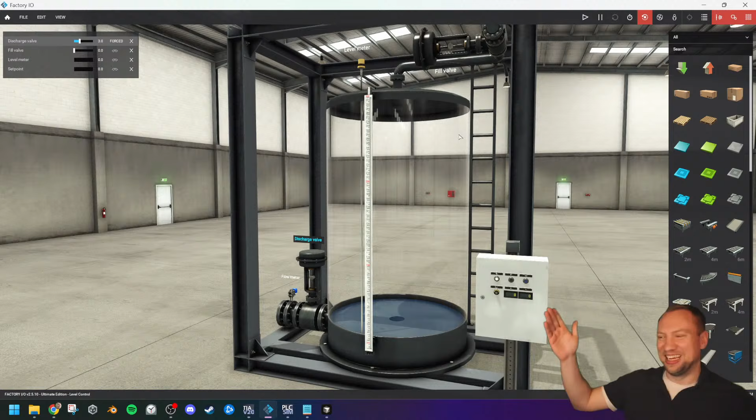Let's have a look. Now, what do we want to achieve? We do have the tank system. I chose this because we've talked about this previously, right? Now this tank system currently is not controlled at all, right? I can manually, of course, turn on the fill valve and have liquid go in, right?

But of course, what we want to do, we've talked about this previously, is I do have a set point here. If I turn this set point knob to like 50%, that's what it is right now. The tank, the controller should control the tank fill level in a nice way. And we are going to have a PI controller today, right?

And I will not program it. The last time, those that have been there, right, the last time I have developed the code, it took me 1.5 streams to do this. I was also teaching, talking, doing stuff on the side and so on. But I messed up a couple of times, right?

So now what I want to do is let AI do this. So I will release the fill valve, and AI is supposed to control the fill valve here, or write me code that does that.

Oh no, you're blind. Hartux, get some rest. Go to sleep, get some rest. I hope you're not in the train right now. Get some rest, or sleep in the train if you're in there. Goodness gracious.

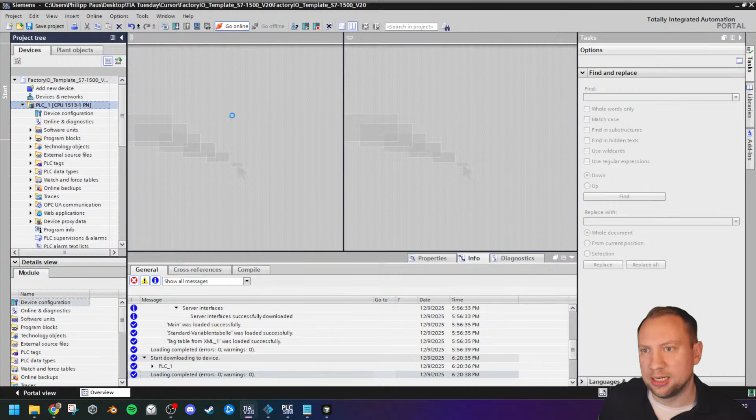Right? Now for this, what I have already done in preparation is I already created a PLC here, and this PLC is currently loaded into PLC SIM and is currently also connected to Factory IO.

What I have also done is I have prepared and imported the necessary PLC tags here. That is pretty much what I have done. So my PLC, I won't repeat that, we don't need to repeat the basics every single time.

So I already have my set point here, for example. I have my fill level, I also have the flow level, flow meter, I imported, it isn't really necessary. But yeah, so for example, I can change the set point here. If I turn the set point knob, you see the set point here in TIA Portal changes, and we have the fill level. So I have already created this link in the background, which is the basics, right?

Hi Tunnel, hi, how are you doing?

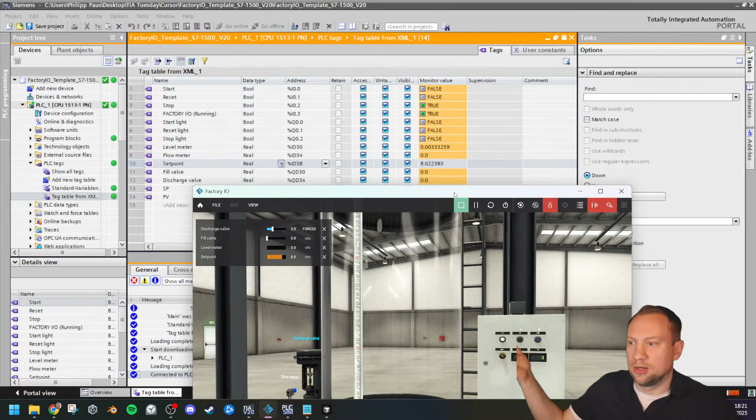Lord, it can make ladder logic. My job is being touched. It's source code, it can generate all kinds of source code.

Ladder and function block and so on use a PLC programming standard which is public, the IEC 61131-3 standard. So this standard, your PLC programming standard, is public. Obviously it can create PLC code, and TIA Portal can use source files, so it can generate source files which can be imported.

Huh, yep, sure, let's see. Oh no, Hartog's already asleep on the train. Yeah, I don't like calls either. I'm not fully against calls, but I don't really like talking on the phone. Never really liked it.

Okay, so that's my preparation that I have done. My program, however, is empty. Is Cursor better than Claude? I don't know, I've been using Cursor for a day and I have not used Claude at all.

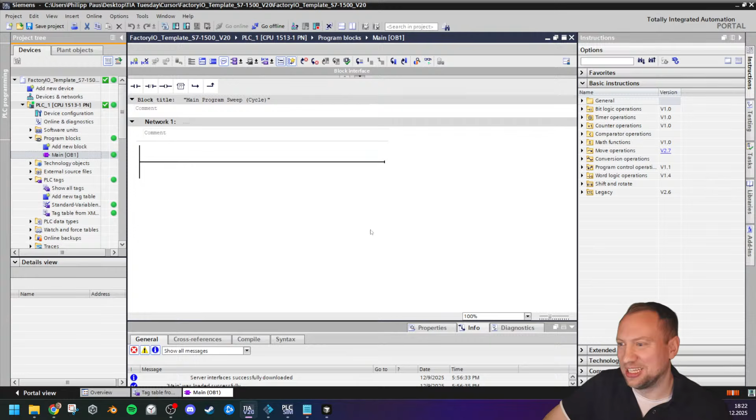I know the numbers of standards, I do know some standards of course. Let's see, Mahmoud says, you think vibe coding can create ladder or function block?

It can create all kinds of things. So let's see, what I want to do, let's get started. Now the first thing I need, I do have a workspace here. This workspace is just a folder that I have created. My TIA project is in there, and some stuff is already in there, like everything that I have.

What we need as well, I will create a new file, and this file will be my... I don't know, how will we call this? We will call this AI PI dot SCL. AIPI dot SCL, right?

A source file, Lian, a source file is code. As simple as this is, all kinds of code are a source file. Now what your PLC does, it takes any kind of source file and translates it into something that it understands. For example, the file I want to create now, I've given it the file ending SCL, so I want any system to interpret this file as SCL code. If you have Python or C# code or whatever, you'd have another file ending.

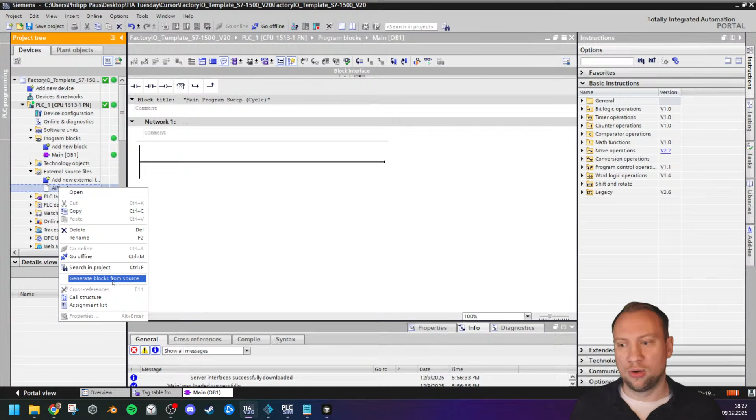If this would be correct code, which it is not right now, TIA Portal would generate a standard function, a function block, an organization block, a data block, whatever file, a technology object would also be possible. Any kind of object that we have in TIA Portal, I could create from such a source file.

Now if I hit OK, it will give me an error. Syntax error. The text file that I have just created is incorrect. Who would have guessed? The text that I have created starts with this. Oh, this is incorrect. How could I forget how to write code?

So now, not just theoretically but practically, I'm going to open another file. Without AI, in any text editor, it could be WordPad, I could generate my code in this file. Literally, I could write the code in there. The IDE that I have, Cursor, helps me with making it prettier.

So if I would want to create a function, I would write 'function', give this a name, test function or something. I would say what's the return parameter. Maybe the return parameter could be an int. And I could give this a lot more stuff here. Now I saved the file, and this should be correct if I didn't do anything wrong.

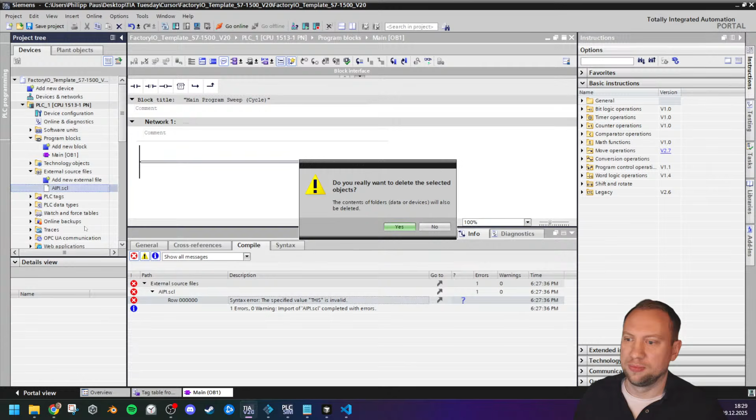Now what I can do is relink the file, because I'm not updating it, I have to relink it. And what I can do now is generate the block from the source, which should create the function here in itself. There we go. This is my test function, the one that I just created in an external text editor.

Could be anything. I could literally open this file in Notepad or in my editor. Now in the editor, I can do fancy things like have a variable input. This variable input is supposed to have two inputs. Input one is of type integer. I do have a second input... it doesn't matter, no, I will not have a second input. Then I will end my inputs, I don't need any more. There we go, I can literally program in the editor here.

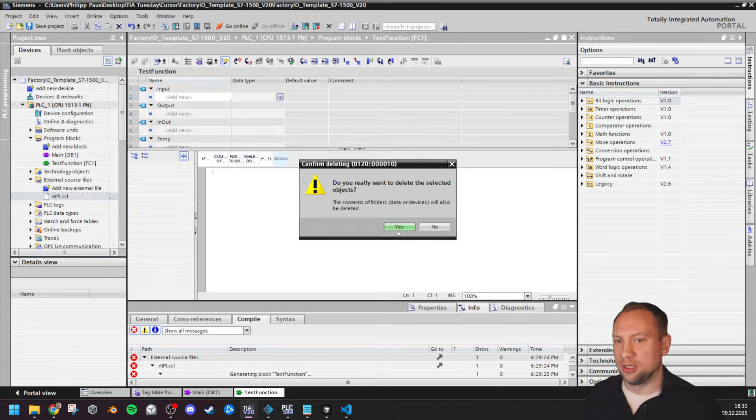Now with this, I saved the file. What I can do is relink the file again, there are better ways but that's what I do right now. And now with this, I should have... oh no, I did a mistake. End function is invalid. What did I do? I probably misspelled something. No, this should be fine.

Do I need to return something? You might be right there. Let me just type out some things that I think might be missing. Yeah, I think I have to return something. You are correct, Jason said earlier I need to return something. So test function needs to return something, which is this block. Let's make this block return an integer, the sum of both inputs.

Now I could have written this in my text editor here, sure, that is the base principle. This is just a text file. Let's assume I wrote it here and I know how to write this, let's just assume this was me, I know what I'm doing. Then what I would do is re-import it right now. I will test it without, but I think I need to. I can now generate the block from the source, which hopefully is correct.

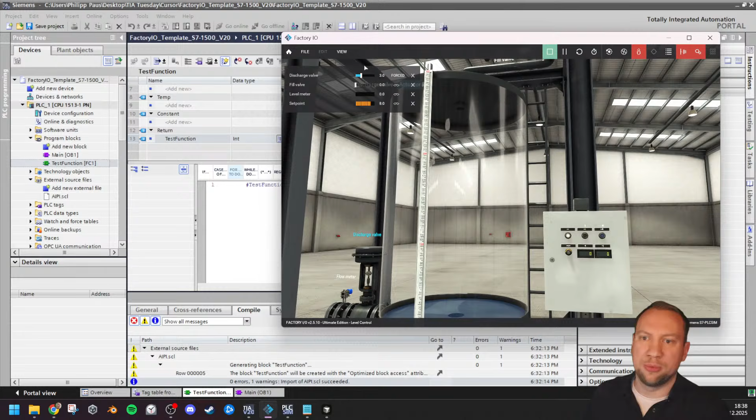Automation and PLC programming says, yes, AI definitely helps. The thing is, it is a tool. You are correct. It is a tool. I wouldn't do it for everything. I still want to be the one that understands everything and that has control. AI is not advanced enough. Mahmoud says we also have the discharge valve. The discharge valve I don't want to use. The discharge valve I will set to a constant value to just have an outflow of the tank. But very good, we could have that as well. Okay. Shall we? Enter. If it right now says, hey, you don't have enough credits, shit. We're done.

We're done. Oh shit, sorry. This is not okay. This is not okay.

So there, Ono asked, which AI tool do I use? It's called Cursor. It's an AI tool for programming, especially. It does that. Oh shit. Oh god. It even knows that I want to have a proportional gain as an input, a KI. It even gave me those as inputs additionally, like it just knows what I want.

And look at this. There's code. I will not read it. Why would I? Why would I still read that code? I will say keep the file. We do have a controller now. This is not okay. This is so not okay. And if I open this in the editor here, for example, you will see we have this code now in the file.

It's not going to work. I can already tell you this will not work the first try. Probably. Right? Most likely it won't. Look at this, author auto. No, the author is me, Philipp. It knows my name. How does it know my name? Shit. Oh no, AI knows my name. Oh god. There we go.

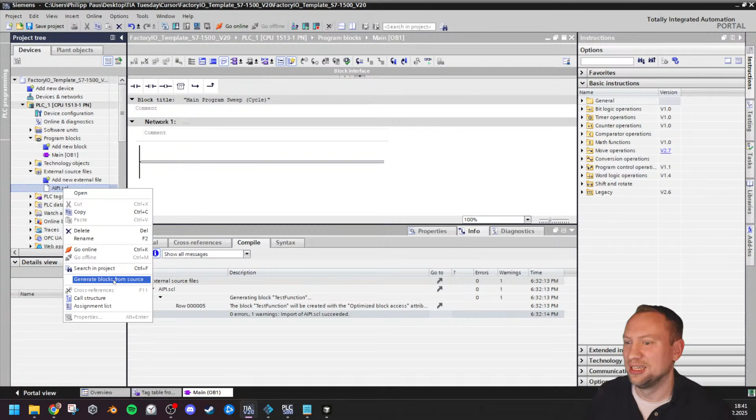I know that. Right now, if I click on generate blocks from the source, there will most likely be a ton of compilation errors. Right? That is what I expected, actually. And that's it. That's the stream. AI sucks. See ya.

This is the future, though. So Emil says this is the future, especially with the integrated Siemens Copilot tool. The integrated Siemens Copilot is fantastic, but I don't have a license. It's way too expensive for me. So no, this is free though. Right?

Ram asks if this would work to generate reusable blocks. That's what I'm doing. This block is going to be reusable. I will have my PI controller block here, and I can reuse it as much as I want. But what we have to do is fix all of this. So usually AI gives you a ton of crap in the beginning, which was expected, I would say.

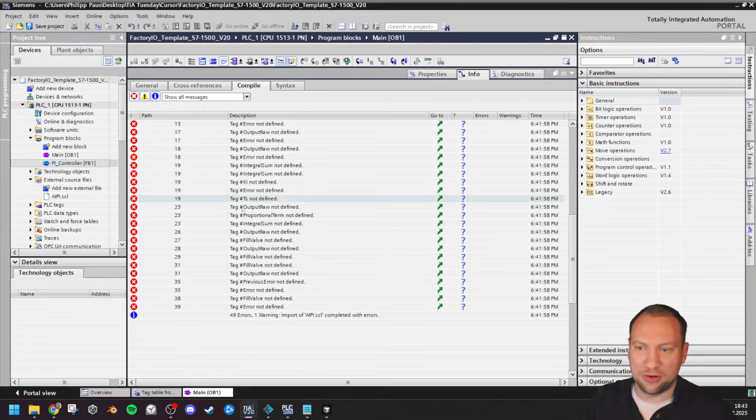Now, was it structured text? Oh, was it structured text? I didn't even look at it. Jason looked at it. Thank you for informing me. I will tell the AI. But what I will do first is make a screenshot of all of this, and I'm going to give that screenshot to the AI. There's more errors down here, but it can fix it the second attempt.

Is it structured text? I didn't really look. It might be just structured text. I mean, SCL is a special type of structured text. So let's give it all the info that we came up with. I think you used ST instead of SCL. I am running this code on a Siemens PLC, and when importing, I get a lot of errors. See picture.

I love this. This is so great. This is fantastic. Can you fix your mistake? Kindly. Claude is the most powerful? Depends. There's so many different models right now. This is just getting into it. Let's see. It might lie. I don't know. Reviewing the current file and correcting everything. Everything is red. It's going to hopefully fix everything. We'll see.

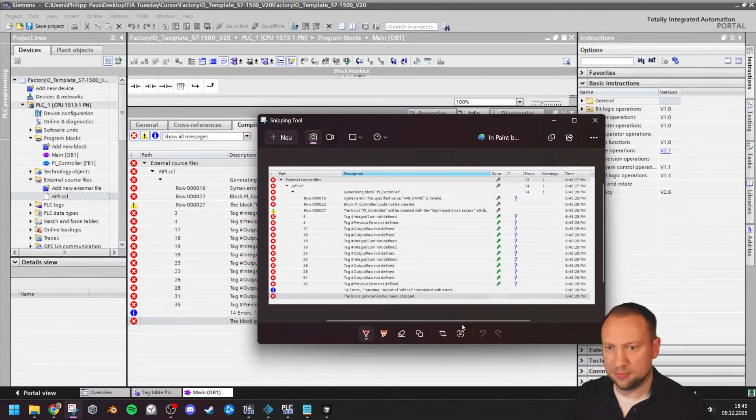Oh, look at this. We only have 14 errors left. Another screenshot. This is wild. This is just wild, right? Another screenshot. Second shot. Right. Another screenshot, and I will now tell it the same thing again. Still some errors. I'm not even going to read the feedback it gave me. I should, but I will not. Still some errors. Second shot. Fix it. Fix it.

The caveman using AI. Kinda, yeah, kinda. I'm old. I have not grown up with this. This is magic to me. This is crazy stuff to me.

He can't declare variables in the interface. So Branislav says he can't declare variables in the interface. Yes, he does. Right? All of the stuff that you see here, those are interface variables. It does create interface variables. Yes. Let's see. Var now? Var temp? No, var stat should have been fine, isn't it? Var static should have been fine. I don't know. Maybe it's just var. I don't know.

I don't need feedback. I do need the feedback, but I'm way too lazy to read it right now. And in reality, of course, I would probably read it. Can I actually generate the block from here? I think what I could do, by the way, is I could go into the folder of the source file and just work in that folder, which I will not. But I could, of course. Then I don't have to delete it every time. Don't want to do it. Let's see.

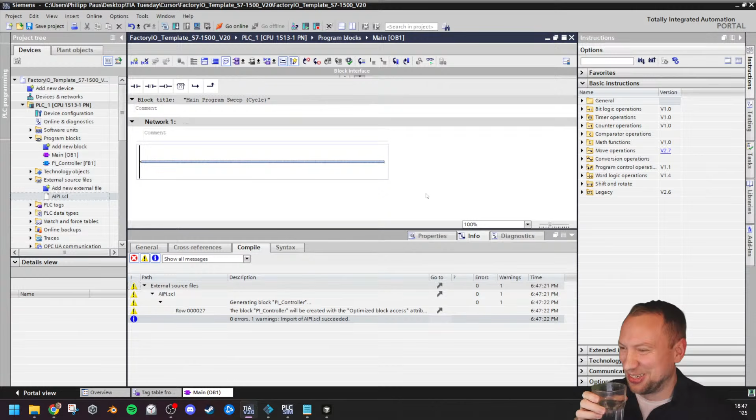Hey, second attempt. That's pretty good. 2 attempts. That's pretty good, I would say. Last time it took me like 3 hours. I haven't even done it. Jason, yes, I will, of course. So the question is, will I open the interface of the generated block in TIA? Of course. That's what I need. What we have now is the block. This block was generated from the code, right? From this code. I don't know what the code does.

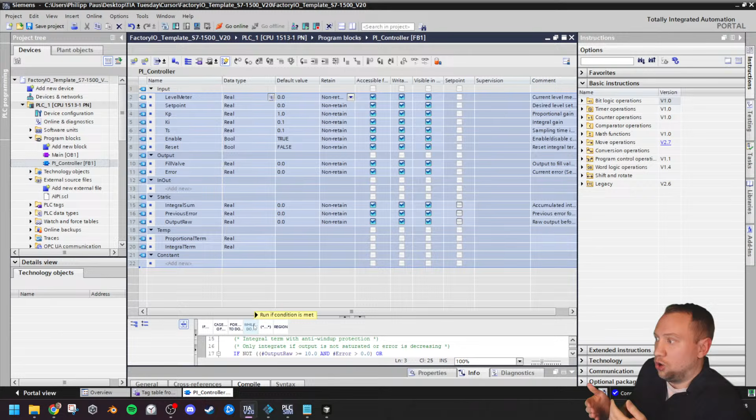2 attempts. That's pretty fine. We will see if it works though. Right? So I do have my PI controller block now. And you see the block itself has comments in there. It has, I don't even know, some of these calculations. It has limits in there. It probably thought of more things than I would. We'll see though, right? And of course, it has created also our interface. The interface here is, of course, very, very important, because that is what I will now integrate in my program.

So basically what I got from the AI is a finished block. If I put this here in my program now, I will need to give it a data block, of course, but I can connect all the ins and outs to it. And theoretically, if it did a good job, we're done. We have a fully working PI controller.

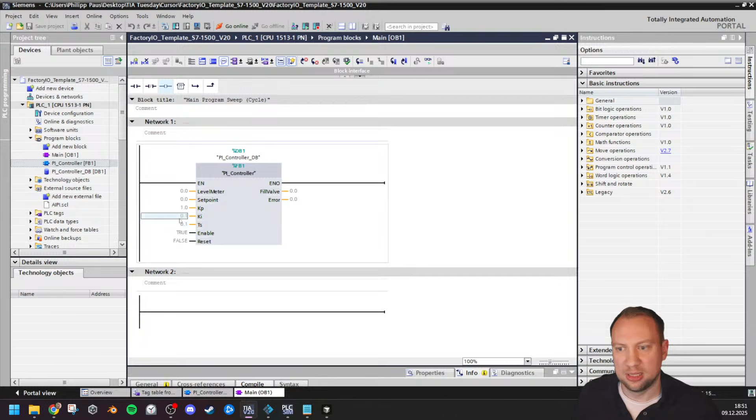You shouldn't do that, because now I would be the responsible one, probably. That would be bad. All I need to do is I still need to link my in and outputs, put my parameters here. I mean, it came up with this thing. It even gave me more inputs to work with that I don't even know what those are. I could tell it to fuck off with those parameters. I don't need them. It knows better than me. So let's leave them there.

So now all that's left to do, and then maybe it is going to work, I don't know, we'll see, is to put my level meter, my set point, and my fill valve. That theoretically should be it.

Yes, Jason, you're right. In the US, it would mean you're getting sued. Yes. Germany as well. Germany is probably even more strict with stuff like this. Yeah.

Amir says it starts to feel dangerous when you put your name on an AI block. I mean, this was just a joke. I would never do that in a real context, right? Don't get me wrong. Please do not get me wrong on this one. I would not do that in real. This is just for show, right? I'm not going to publish this. I mean, except for the video. But here I clearly stated it wasn't me.

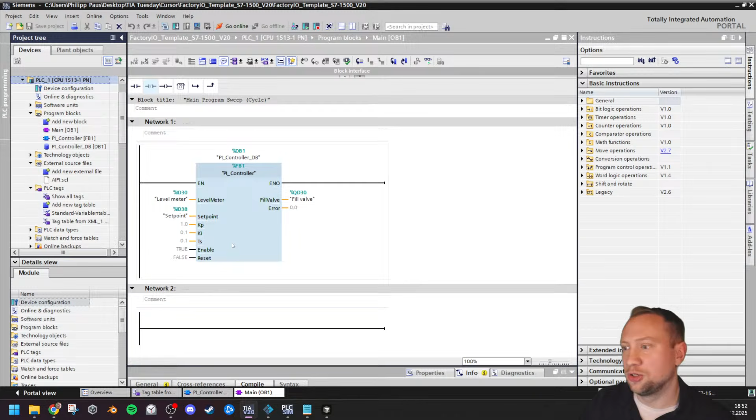So Video Kaiv asks, very good question: why do I put it in OB1 and not OB30? So I could use another organization block, and I think OB30 is a cyclic interrupt. A cyclic interrupt, where you would usually put some of the stuff, happens and does the things every 100 milliseconds. Now,

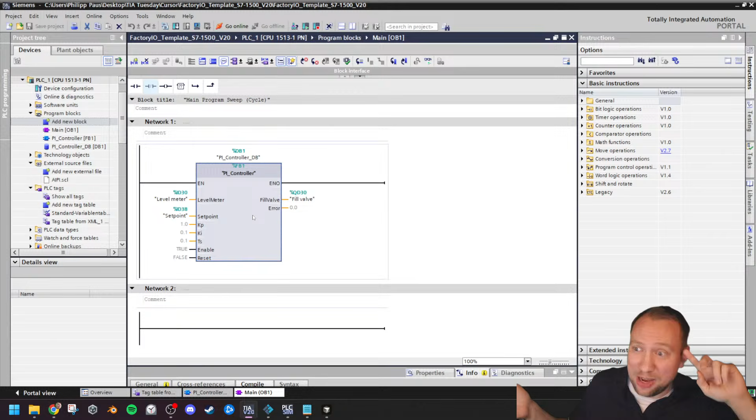Kaiv, right? If you see this, I'm not going to look at the code, not at all. But I can just assume this TS is like a time scale. So internally, this thing probably has a time scaling inside of it. So it probably will analyze the timing. I don't have to put it in an OB30 or so. But I don't know. I assume it has some TS factor in there.

Which is not completely correct. You're right. Yeah, no, you're right. It will not be 100% correct. But that is stuff that I would need to fix after I've tested it. But you're right. I should now put it actually into a block. I would ask the AI, but I will not. Okay. Let's see if it works.

Right. So the set point is somewhere. Let's put it to somewhere in the middle here, like half the tank-ish, which is 150. Let's see, 150 where the cursor is. So it should go somewhere there. Maybe we're going to have an overshoot. I don't know. We have an overshoot, but it stops.

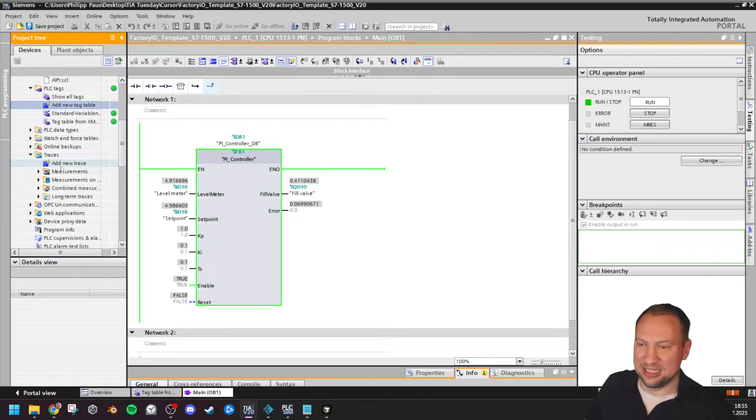Right? So I'm going to make a new trace. We're going to take values and we will see if it can work with it. I don't know. I really am in the dark as everyone else is at this moment, including the AI that is doing it, which is crazy. Including the AI. There we go. And then the fill valve. Maybe it is going to make a great thing now out of this. It's already extremely impressive.

I have developed PI controllers in the past, and I have failed extremely. So the AI probably at some point will also fail, but it's still very, very impressive. So let me see. No record, no sampling, use maximum. Oh, I'm online.

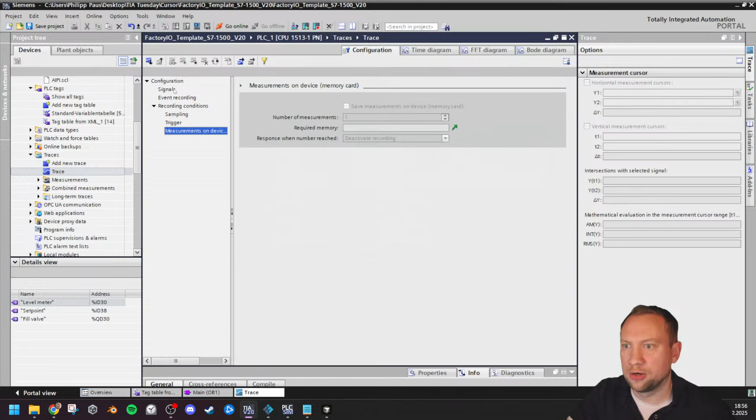Boink, I don't care. Record duration, I just want to monitor without triggering. Perfect. There we go. Save the thing, download it. Yes, I know. So now what I will do is I will gather some data, right? So that is me just gathering some data right now.

Scaling group 1 again. And I will not tell the AI much about this. Right? I will just give it like a picture and I will let it find out things itself. This looks so cool though. Like from nothing that it can do this is just crazy.

Can we try reducing the gain to 0.6? Absolute alien? Absolute alien. We could. I will not do that right now. I will let the AI figure things out. This curve, though, looks kind of strange to me, but it's okay.

Let me reset all the values to 0, though. Like the tank to 0. Yoinkos. Because I want everything to be 0 now.

Yeah, I know. It doesn't matter. AI is a great tool. You still need knowledge, right? I have some knowledge, so it is fast. It's a great tool, but you still need some knowledge there.

Hey, Lucas. Hi. Sorry, I just started watching a moment ago. Yes, I used an AI agent in Cursor. Yes. And exactly, did some programming, and I'm now importing it into TIA. 100%, that is what I'm doing.

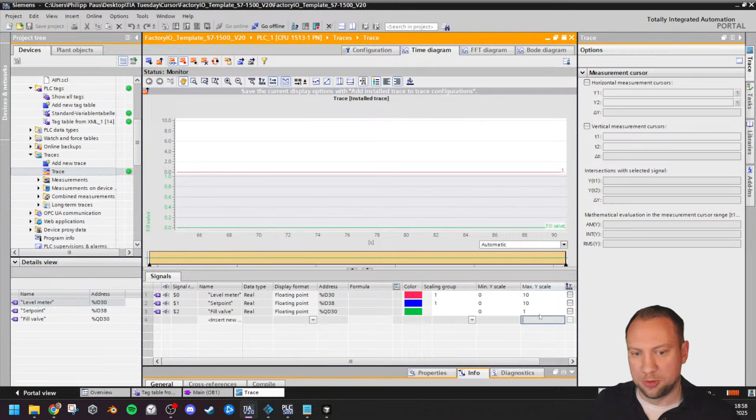So let's also put this to 0 to 10. Yeah. So now we will make a screenshot then soon. I want to set the set point here to 5-ish. Right, let's actually do the set point. Can I manually set this? I could, but no. 5-ish. There we go. Right. Now I will let TIA take data here. And then I will use this data to send to the AI.

Oh god, this is too short. I should have... No, I need to change the trace first. I cannot do it this way. We're taking too many samples here. Record every maybe 10, maybe every 25 cycles should be enough.

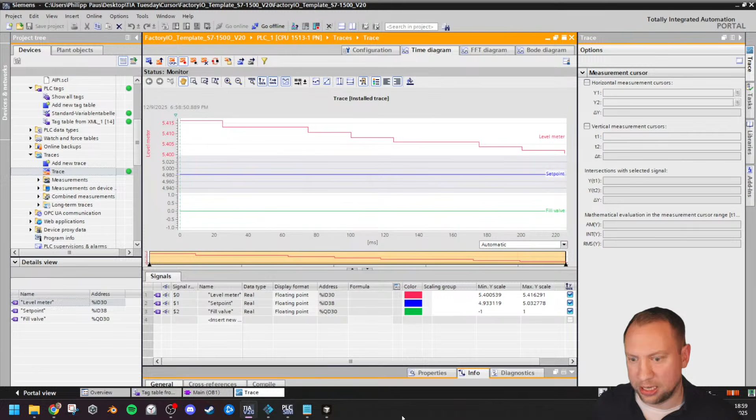Wait, can it only do 27,000 samples? No, that is correct. I'll download the trace, override it. So now we will have 25 times the time here. What I will need to do now is reset everything. This is kind of annoying though, that the trace doesn't save. Come on, stop autoscaling. Stop autoscaling.

I will be with chat in a second there again. Right now I want to fix this. Not with Cursor, but I want to have a nice screenshot here. So reset everything, let it settle for a moment. Right? Hey, the integral value is still there. It still tries to fight.

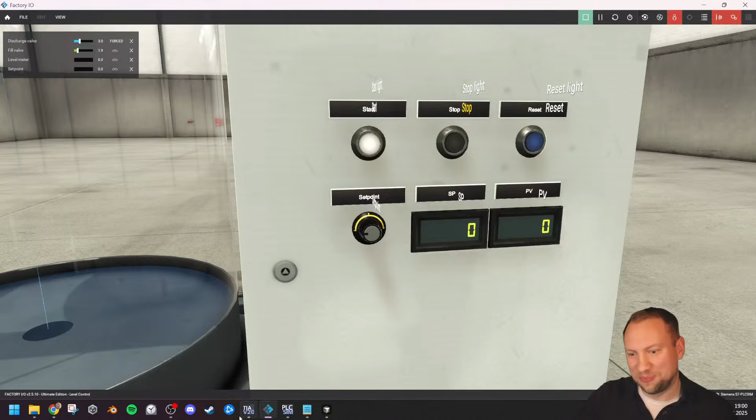Oh, there is a reset input. That's probably what the AI generated the reset input for. I assume. Don't know though. That's good. Okay, I clicked the wrong button the whole time, sorry. Now let's reset this again. And now let's wait for a couple of seconds so that the...

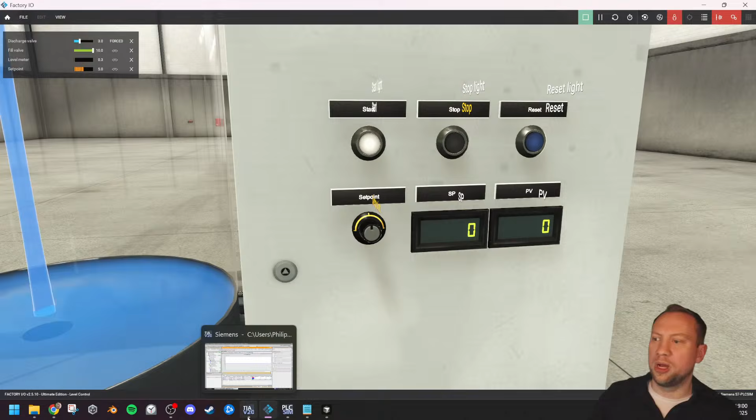Oh no, I don't need to. I can just restart the thing here. Stop. And restart. And now I will go again here to the set point, 5-ish. That was way better. There we go. Now this will take a longer recording time, so I can read chat for a second here.

Hartux, wait, I need knowledge. I thought I just have to be persuasive. Engineering and programming is, well, it's both. It is very much both. But you need some knowledge at least. Yes, Jason, have a good one.

Mahmoud says, it will be difficult to give accurate parameters. I can't make the tuning. The AI will. Pfft, why would I care? Right? I can see that this is not good, but the AI will verify it. And I will wait for one more oscillation or so. I don't know how long the recording time is, but let's wait for 1.5 minutes.

And I hope if I press the stop button that it doesn't delete everything. Does it? This is just crazy. If it can do the tuning in a minute, that will just be crazy. Yeah, it just stops. Okay, perfect. Now, I'm going to make a snapshot of this. Make a guess. Save. Trace. I'm just still baffled that it works, right?

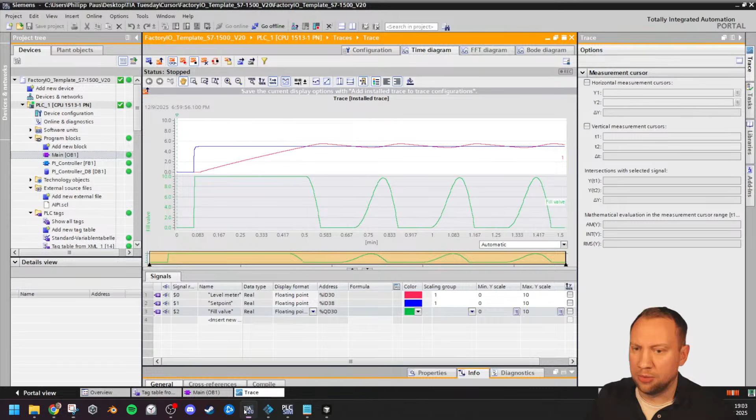Code works great. Thanks. Can you tune my PI gain parameters though? Wait, is the screenshot okay? I don't know. No, the screenshot wasn't okay. Of course, down here, it needs the information what color is what. I think. Don't know. We will find out.

This is so crazy, this is just insane. I have made a signal trace over 1.5 minutes, see picture attached. Trace - I didn't save the picture. That's the wrong picture that it has now.

I want to override you, I want to get rid of the picture, and now let's have the trace. This is just crazy, let's see.

Shit, it doesn't see the picture. It cannot interpret the picture, unfortunately. Is there autotuning? So Zinger asks, is there autotuning? No, we just create the block.

Alternatively, you can share the trace image and I'll analyze it. Yeah, that's what I did. Reviewing the current code - wait. I gave it the trace picture, didn't I? I think I did.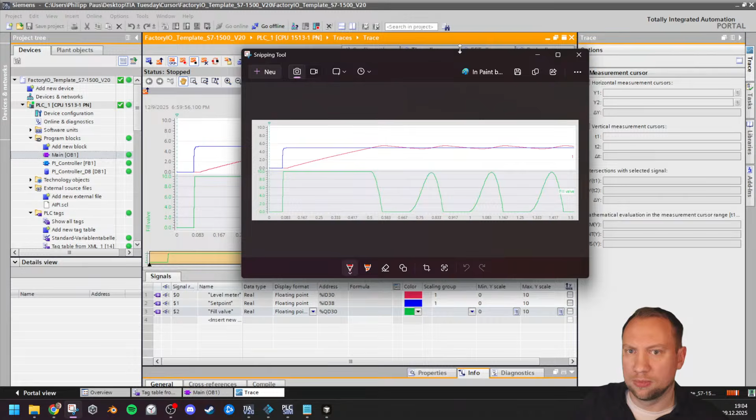Maybe I didn't? Did someone pay attention? Did I upload the picture? I'll just give it this, maybe it can interpret this already. Can it? Wait 1 second. Can I add the... why does this just say 1? Oh, that's scaling group 1.

Let's try again with this picture. And it can maybe interpret the values themselves. Can you work with this picture, this trace? I didn't - thank you very much. I didn't, it might be. The image was not inserted into the...

God damn it, that is like forgetting an attachment to an email. Oh, it just tells me what to do - don't. I don't see the image in your message. Did I not do it again? I did, I think. Wait, it doesn't work. Huh? Picture?

This time with picture - still not. Still not, so this is always me, of course. This time was me, but I select the picture, didn't I? That trace, huh? This screenshot works, but the trace doesn't. What? So I pressed on it. It didn't work, I have to make a new one.

So it wasn't me, I did it but it didn't do it. Out of credit? No, it was me. It was me, it was probably me, I think. So I do have this, and I save this - dieses Bild konnte nicht gespeichert werden. Was? What? I think I broke my Windows right now. Whoops.

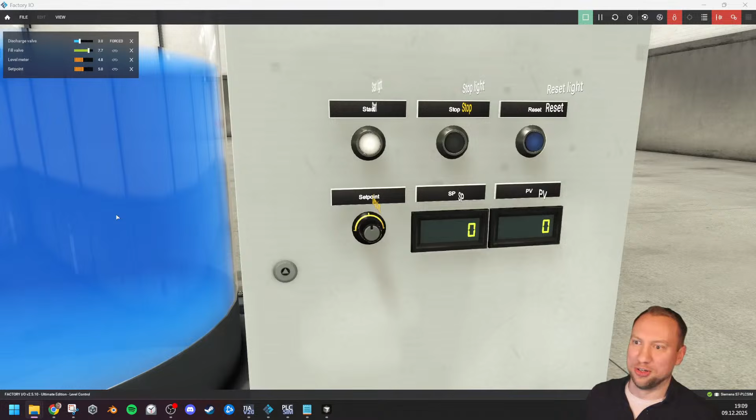So it has new values, now right? I could now - what I could do is I could just take those values and put them into my program, but I'm not going to do that. Who am I? We all know what I'm going to do. I will, of course, re-import the whole file.

It just changed two values, I'm going to re-import the whole thing, right? And once I do the generate blocks here, it is going to override the one that exists. I can't do it when I'm online. It will override the one that is in my project, so I don't have to do anything else except for updating the block call. There we go. And it has new P and I values.

I couldn't even change two numbers by hand. No, I have my AI doing it, it has to do it for me. That's how I love it. So, resetting everything to 0.

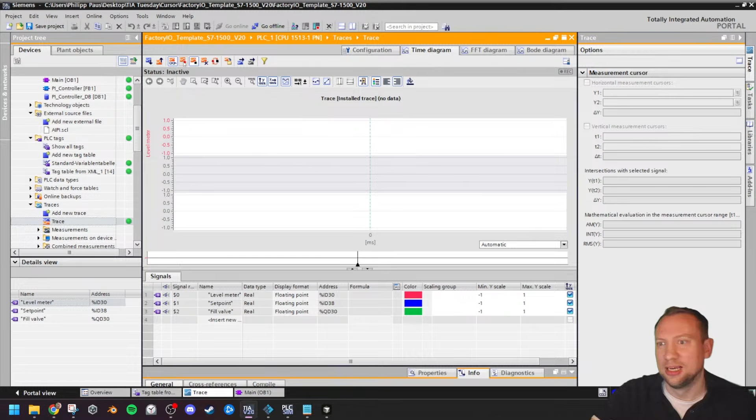Right, there we go. We cannot, Popenat, we cannot share any password unlocks and so on. That would not even be legal from what I know.

Let's see, let's do the scaling groups here again. Let's do the min scale, max scale. All correct here. I wonder if I can save this somewhere so it does that all the time again.

Hey Cyber, I am also impressed by all of this. This is crazy, I haven't written a single line of code right now. I haven't done anything, it's all AI. Literally is.

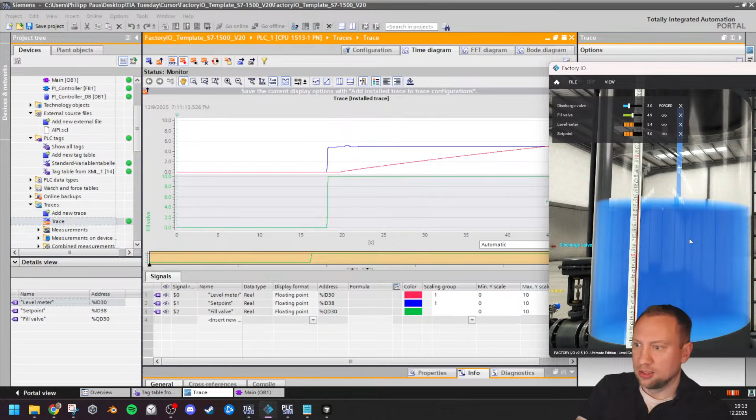So let's see if it can get rid of those overshoots too much. I don't know if the parameters are better now. I haven't tested anything, but I guess.

Maybe it is, it's still pretty aggressive. No, it is not going into the saturation anymore. This might be better. It might be worse, it might be better.

Prompt engineering is a thing, though. I know, vibe coding, prompt engineering, it's all real, it's not like I'm making this up. This is what people do, right?

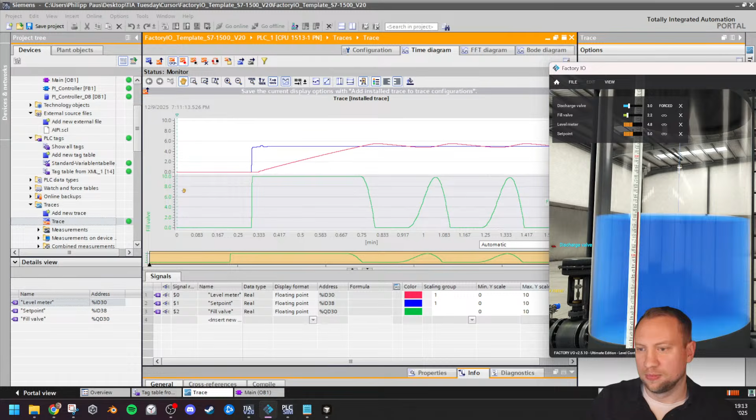Still a lot of oscillations, but I'm not going to go for a third round now and have it improve this even more. I will definitely not do that.

Still oscillating. I will give it a try. If I say still oscillating, that's it. Can I compare both traces?

Ooh, Assistant Google, that is a very good question. I don't know if I can upload two pictures. So it's still oscillating and it will give me new values.

Reducing gains further to dampen oscillation might be a good thing, might not be a good thing. I don't want to test it like 100,000 times now, but what Assistant Google just said there is very... No, I will do something else.

This. I'm gonna mess everything up now. Now this is gonna be so great. We could try and improve this now along the way and so on, right?

Hey lolpaz, has it been 3 years? Long time to see. I'm doing good, a little ill today, but it will be fine.

So what we will do now, the AI here, look at this: add derivative action for damping. Oh yes, can you please do 2?

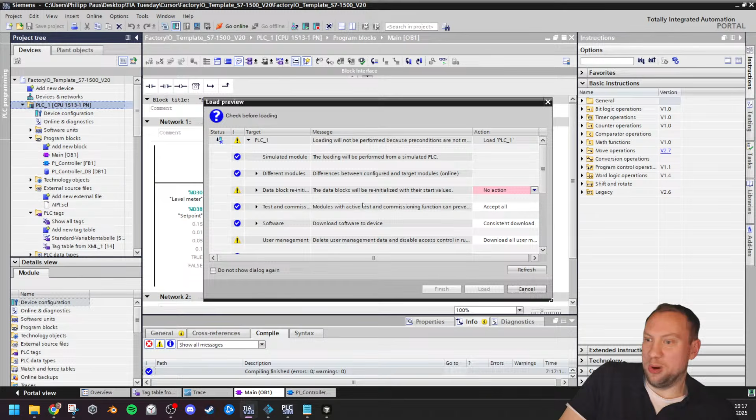Well, oh god. Assistant, I did write all of the code. This is all my code. I didn't, no wait, don't get me wrong, I didn't write a single line of code, but it is my code. I don't have to write the code, right? But it is my code. You saw me, this code did not exist an hour ago. None of this existed, right? I have created this.

Which, of course, I'm making this a little bit jokey, but there's still a lot of legal stuff going on. It's not like using AI will improve a lot of things, it will also make things worse. There's this whole discussion, if I am pro AI or against AI. I will not get political. I am using it right now, I know it is there, and I know people will use it. It is there and it will stay, that's a state that we have, it will be there, and my thing that I do with AI is I adjust. I have to adjust, it is a tool, it will be there forever, or who knows, but definitely for a long time. If it's good or not, if it takes jobs or generates jobs, I can't tell. If it's a good thing or a bad thing, I can't really tell. All I would do is make assumptions. All I know is it is a fantastic tool that can help a lot. And I would never, in reality, sell AI code as my own. Never would I ever, this is just me joking around here. Yeah. Okay, serious note aside, but I had to say, this is my opinion on this. Not going to be political. It is an extremely powerful tool.

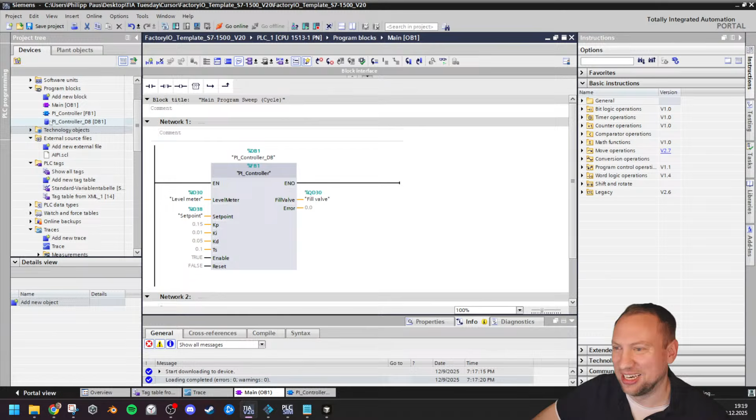So is Cursor tailored for programming or just another ChatGPT? Cursor is tailored for coding, yes. It is an IDE, Cursor is the IDE. It uses AI agents, but Cursor is the IDE.

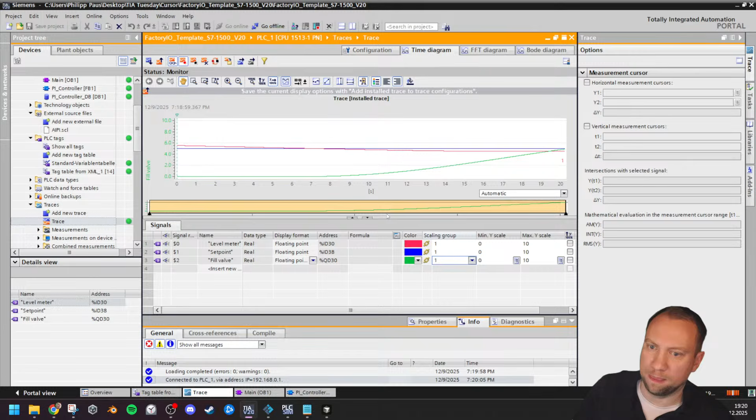So let's see, did I? Yes, I already did this. Let me download this and make another trace, and we'll see if our trace here works. If our system is doing the right thing, I will again need the same scaling groups. Why do I have to do this every single time? Kind of annoying. I could also put the fill valve in there, it doesn't matter, yes it's also in scaling group 1. Please all go in there. So let's see, I want to go back to 0 for now, so I want to reset this, and I will wait for a second here for all of this going back to 0.

Yes, logical controls, that's exactly what it is, it is a programming IDE. It even uses, I don't want to talk too much about it, but it uses Visual Studio in the backend. If I install a structured text language highlighter here, it will also be available in my Visual Studio Code. They share kind of a backend as far as I understand it. So this replaces your Visual Studio Code or Visual Studio, your IDE, whatever you have.

Mahmoud says, of course, yeah, and you think it will be more powerful in application? Don't need to. Yeah, we'll see.

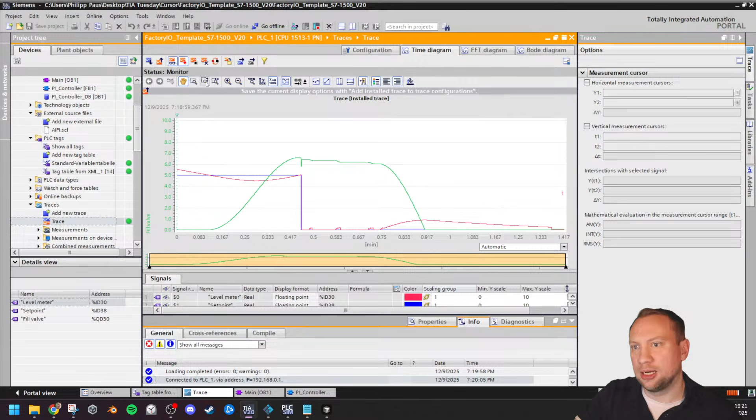So let's see, everything is kind of reset. Let us restart our trace here, stop and start recording, and let us run the whole thing. So setting this to 5-ish, and let's see if the derivative part breaks everything now.

Hey Ignatius, hi, you just got home? Enjoy your evening, get some rest. I have been here the whole day, I've been outside a little bit but not too much. Hey Marlord, watch me like 7 years ago. So many memories, I have created some videos I think more like 5 years ago, give or take, but it might be that there's some videos 7 years ago, yeah. But hi, how are you doing?

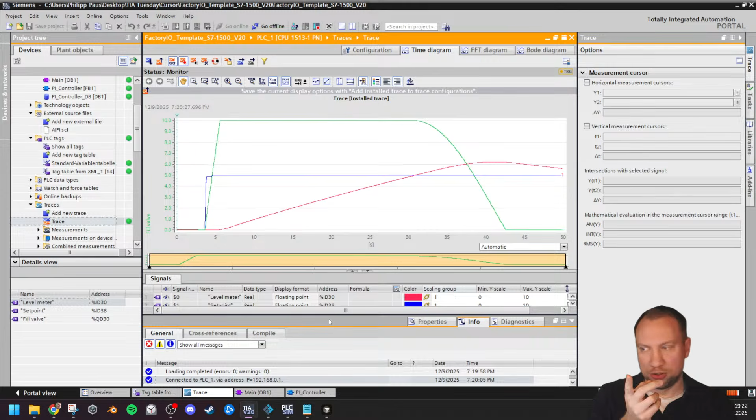Emil, that is also my thought about this. Derivative is definitely not easy. That is why I wanted to test this. I was like, hey, let's give this to the AI, maybe it is going to make things great. I don't know what's going on. Like, this is all the AI. I have integrated it now, so I kind of know what I'm doing. Nevertheless, this whole thing has been developed by AI. I have just integrated it.

This looks promising. This looks very promising. The green one is our output, right? The green one is our fill valve. And it did not overshoot as much as it did before. So maybe we won't have as much oscillation going on. If this doesn't go to 0, but it does. Okay, yeah, it goes to 0, so we will have problems. If this would not have gone to 0, it would have been better, most likely.

We'll see. We might have problems. It might be okay, but I think we will have problems. This oscillation will be steady, will be going on. Maybe it won't. It might be getting smaller. Nah, it's the same level. Look at this. If I add a vertical cursor here, which I can place there, like there and there, they are approximately the same height. So the oscillations will go up to the same height right now.

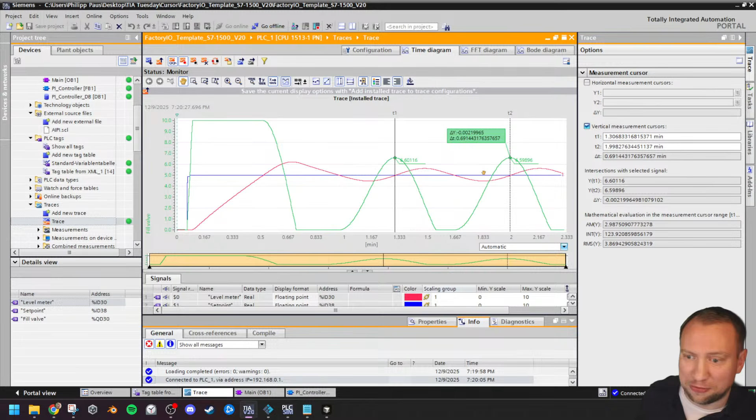So it's not perfectly optimized. But this is a freaking PI controller. It's crazy. A PID even now. Not perfectly tuned, but that's fine. This is fine.

Emil asked, has it added anti-windup and saturation? I think it has added saturation, but I don't know if it has added anti-windup. Here's the code. Have a look yourself. What do I know? There, look at this. Does it have integration saturation? Where is the derivative term? Integral sum. So the integral sum does not seem to be kept. But I don't know. From a quick look, I would say no.

Thanks, Crocodile. Best teacher you ever had. I do have to apologize, but until now, I didn't even know you exist. As sorry as I am, I have been a bad teacher. I'm sorry. But I'm happy you learned something.

Oh, Emil says it has edited an SCL. I don't really care if it has done anything here correctly. It might have not. It kind of works. All of this code is from AI, including the comments, including the interface here, including default values, including literally everything. All that I have done is I told the AI here what I need. And that's it, which is just crazy to think about. Right? And I am completely stunned. This is fantastic. It's also fun, right?

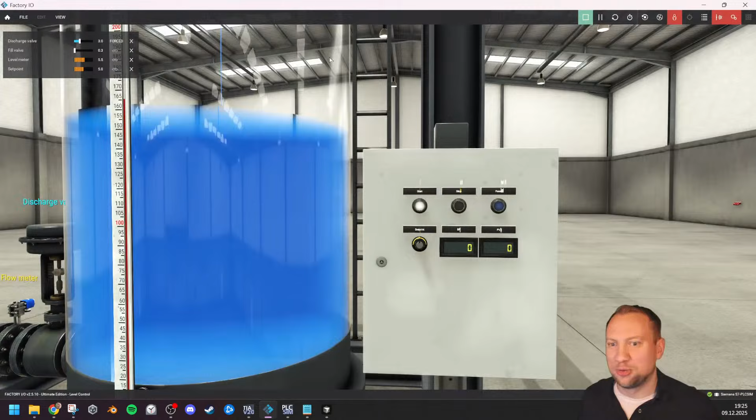So what we could do is we could open up. Wait, is it? No, wait, it is not. It's not doing better, right? It is having the steady oscillation, but it kind of looks cool. So now what I would need to do, of course, I would need to lower the values. I can try a little bit. Would lower KP, KI, and KD. So let's say this. Wait, how is this done? Is this multiplicative? Yeah. So 0.005. Let's lower the values and then we would be able to see.

Ignatius asks which AI platform. I used Cursor. You can just download it. It has pre-installed AI agents in there. It's easy to use. I just downloaded it yesterday.

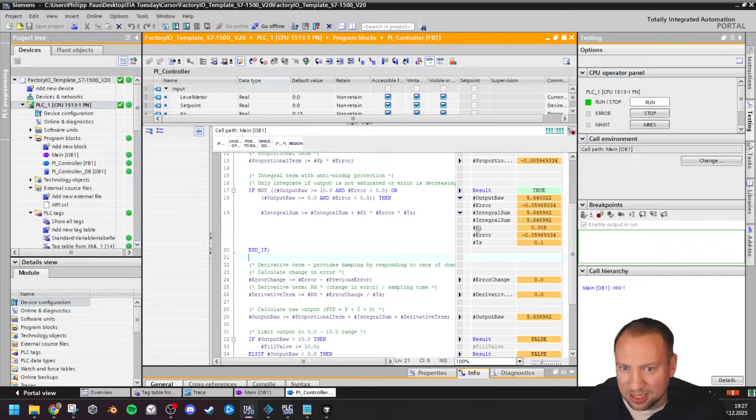Crazy stuff. So now I have changed the values, I think. Did I? If I go online, I can see the values. KI, KP, KD. Where are they? KD, of course, I opened the KD. Integral KI 0. Yeah, I changed them. And now the whole thing should be a bit slower. Maybe it will settle now. I don't know. I would be testing around. We're not gonna do the tuning thing again. I did the tuning thing a couple of weeks back unsuccessfully. I will not do it again now. I could, but I will not.

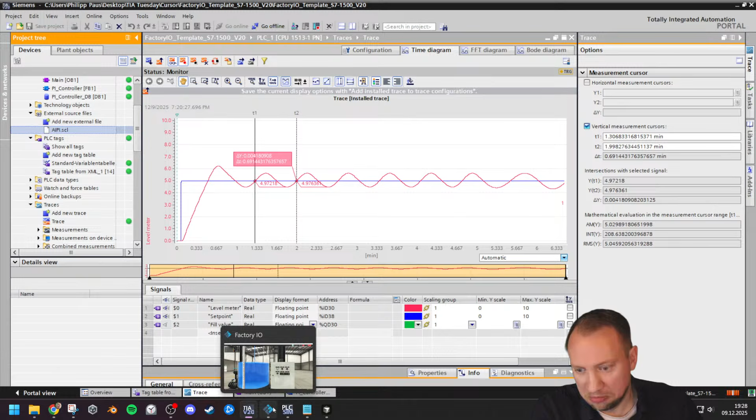Perfect. We have written code with AI. All of this was me also chatting with you and doing a lot of other things on the side, but it's still crazy having the AI generate this code for us and having a working PI controller now in the end, PID even, is just insane. It's cool. It's really cool. I like it. If AI is the greatest thing, I don't know. It is a tool that I like. This is great. It can write much more complex things than this. Fantastic. It's insane.

Let's break the whole thing. Let's change those values to crazy stuff. They're probably kept. I don't know. I haven't really read the code. I really don't know what the code is doing too much. But right now, this should be crazy.

The oscillations should... I mean, this is still okay. This is pretty decent now. It's more aggressive. I made it much more aggressive, but it's still okay. Like, it even prevents the system from stupid operator stuff that I just did. Crazy. Crazy. This is fun. But as much fun as this is, I'm going to click on Save Project here because I will keep this.

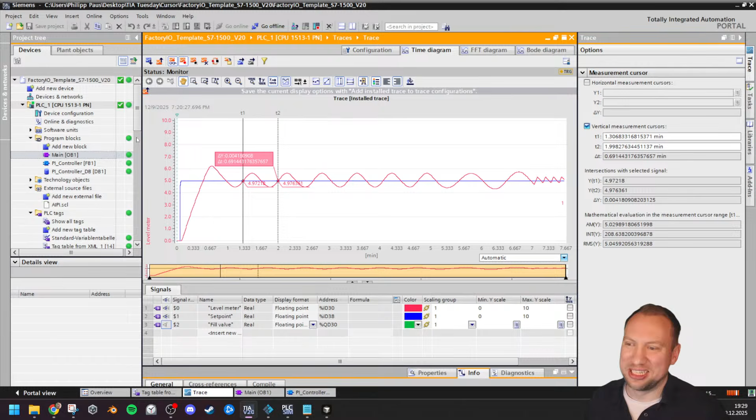This is crazy. The effort I put into this is extremely low. Right? The effort I put in here is almost nothing. I worked for maybe 5 minutes in total. Right? That is it. Can I tell the AI to integrate Ziegler-Nichols method into the code?

Oh, wait. Can you integrate a tuning method into the function that is triggered by a Boolean input? I would just ask.

Emil will be back in 30 minutes. I will not be streaming for another 30 minutes there. Right.

Implementing a step response tuning method that analyzes the system response and calculates the optimal PID parameters. Are you kidding me? Holy shit. The question is, can it program HMIs? Yeah, HMIs can also use external source files. Yeah.

Yeah, logic controls. A lot of people hate on AI, but I see no difference than screwdrivers or shovels. As I said, I'm not going to get into a political discussion. It is a tool, right? Whether you hate it or you like it, it's there. Like a shovel, like a screwdriver. Make of it what you want, right? People hate all new things, right? There were people using typewriters for decades, and those got replaced. It's a modern thing that is there. We have to work with it.

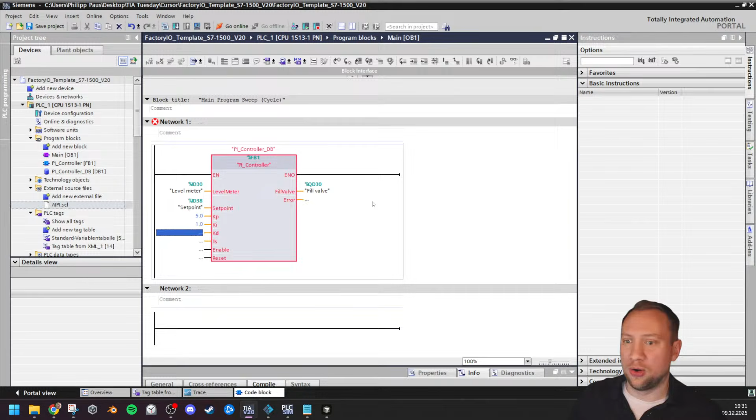Yeah. There we go. Let's see if this controller can now optimize itself. I literally don't know. Holy shit! What? Autotune. I hate this so much. I will need to sit down. My energy is running quite low, so I've got maybe 10 more minutes before I fall apart.

Holy shit. Are you kidding me? It has a tuning input now. What is this? How? Okay, this is fun now. This is actually crazy. I will create a variable here that I will call autotune. This tag, I actually want to do the correct thing and make it a data block. There will be an autotuner here. It's a Boolean that I can turn on and off. Yoink this in there.

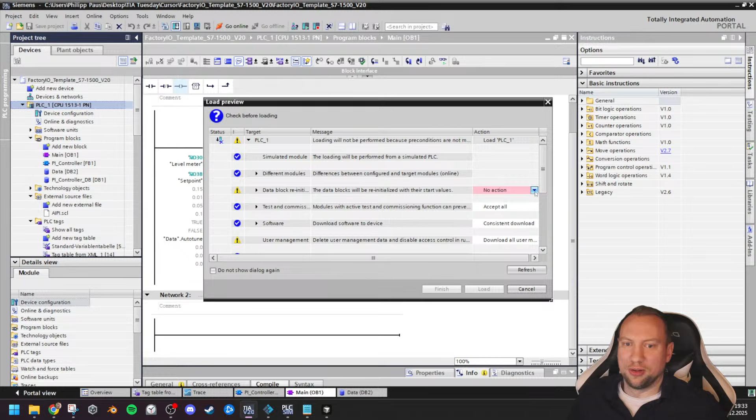I will download the thing now. I don't know how the autotune works, by the way. How would I? Let's put this to 0. Let's reset the whole thing. It probably described how it works. I haven't read this. I'm not going to read anything. Screw reading. Did it tell me?

Tuning takes about 1 to 30 seconds. Keep autotune true during the entire tuning process. The controller uses tuned parameters automatically after completion. Tuned parameters are stored in the variable in-outs. If tuning is interrupted, you can restart it by toggling autotune.

I mean, sure. So the set point is almost 0, so this is off. Now for tuning, what we have to do... Wait, we don't, theoretically. Let's do it. Autotune. What? It has changed values here? I don't know what's going on, though. It told me it will take maybe 30 seconds, so I'm not going to touch anything for 30 seconds. Has it been 30 seconds?

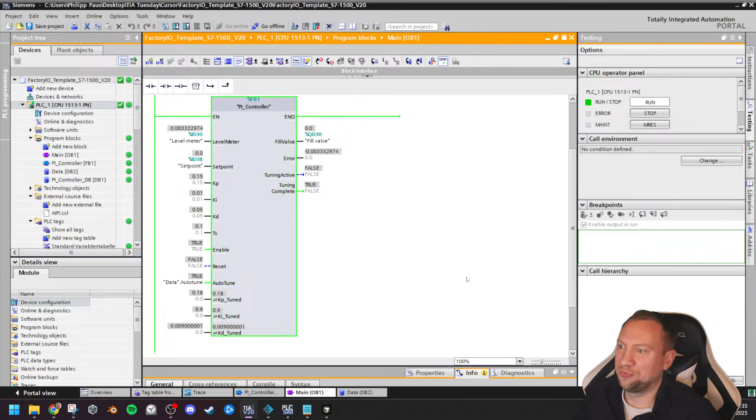I'm going to read the chat in the meantime. Ignatius says, you actually like and hate AI. That's the same, it is a combination of everything. Kiss says, AI can do anything as long as you precisely describe what you want. And that's why I say it is a tool, right? I have to use it somehow. You use AI to check your son's homework. That's great. Don't trust it though. It is not always correct.

But neither am I or anyone else. Logic Control says there are pretty high-paying jobs these days called prompt engineer, just for accurately describing stuff to AI. Yes, and that will be a thing. Like that is a job. That is a new job that is out there, and it is important. That's one of the things that I said. It is important.

So Zinger says set point has to be set to 5. Logic Control says set point has to be set to 5. You are most likely correct. The problem with this is that I will have to be fast now because it is filling up things. We'll need to work with the step response. We'll see. But you are right. Yeah, now it is 5-ish.

It's just crazy. I don't know if it does anything though. How do I know? I don't know. Tuning complete. Look at this. Tuning active? No. Tuning complete. I didn't even see it has outputs for this now. So, is it now using the tuned parameters or is it using the start parameters? I don't know.

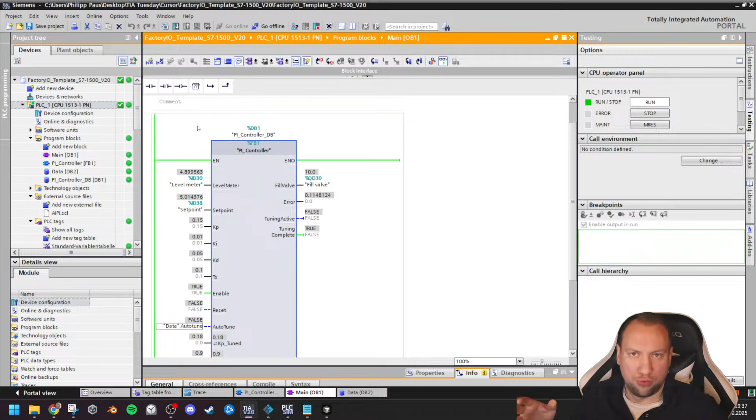The thing is, I don't need to know. That's fine. This is not for me to find out now. This would now be really getting into programming. That's not the part that I wanted to concentrate on. I wanted to see the power. Of course, I could now really integrate this more, but it is interesting, so much. But that is not for us to do now, to analyze really what the AI did. It did something.

Now, really using this to our advantage, we already do, right? It is already working pretty nicely. I don't want to optimize it too much. Optimizing it would still take a lot of time. It will take less time than me trying to do it manually, definitely. But however, I will not. This would not be wasted time, but let's see.

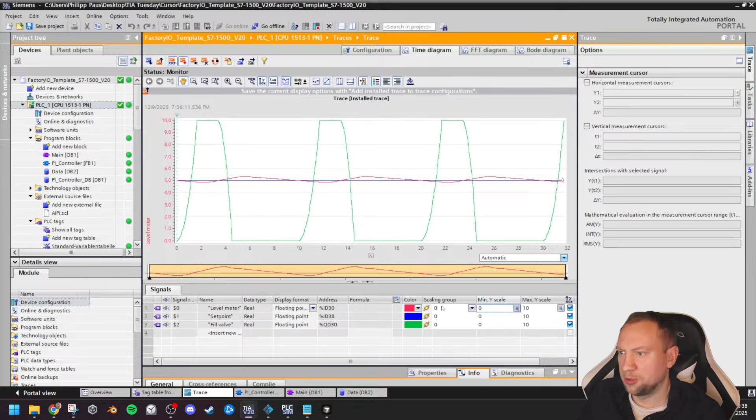So Brian asks, how do you create an external source? Did you copy the code and paste it in a node? No, Brian, rewatch the video a little bit. I did this in the beginning here. I have my workspace here. I have created a file, just a text file called AIPI. And this text file I have put into my external source files in TIA Portal, just by importing it. And then from this text file, I can generate the blocks. Now all that is left to do is fill the text file with code, and that's what the AI did.

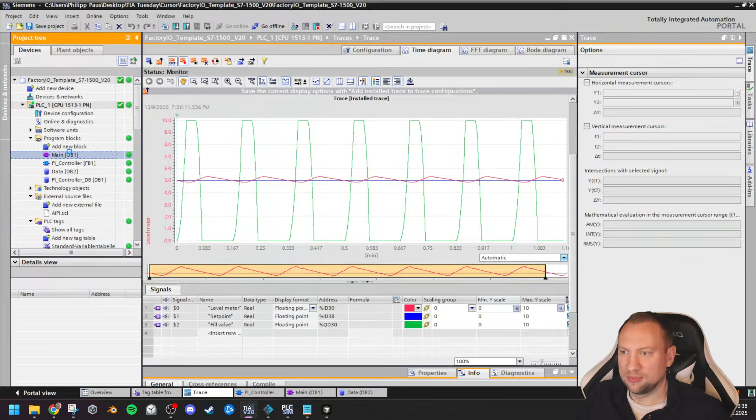This is still all or nothing. Yeah, this is not perfect. Definitely not perfect. But also, I would set this to 0, actually, if we disable all of this. And now this last thing that I want to do. Have two variables, one disable, one autotune here.

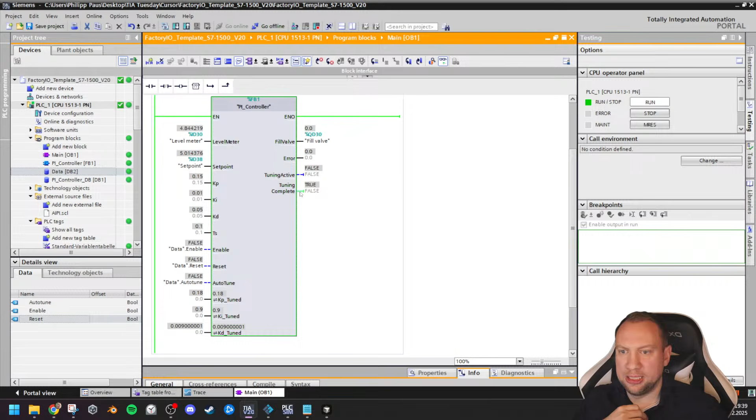The pure idea of me now using this code and creating variables that I need to integrate into my code here to really use it just tells me how crazy powerful this is. I am literally just using a block that is a couple of hundreds of lines of code, 229 lines of code, and I can just use this one. It's just crazy. So right now it is turned off. Tuning complete.

Let's reset our PLC here for now. How? Wait. Memory reset. MRES. Where is my MRES? I have to be online. Let's do a full memory reset here. Yes. Just to make sure everything's fine. I did the memory reset, and now I will reload my program. I want to have a clean state here. That's what I want.

Why can I not start? Why did my PC go very silent all of a sudden? I don't like it. PLC SIM also seemed to have crashed. Fantastic timing there. Perfect. I want to wrap up anyway. Perfect if it just crashes. It has been doing that for a time now. This is not AI. This is PLC SIM now, which I had problems with early on already. Let's see.

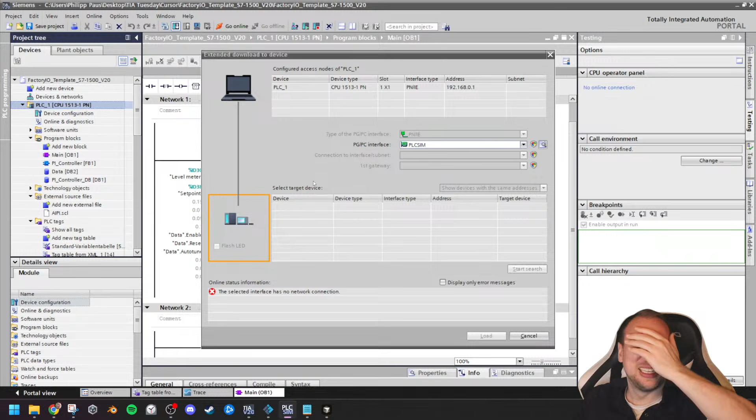Yeah, I don't know why this is happening now. PLC SIM doesn't seem to react anymore. I can try to kill it, but I think this is going to kill everything. Let's see. But right now, this is definitely a PLC SIM issue.

I do use Windows Home, so it could be a problem within Windows Home, yes. There is no PLC SIM instance. Why is there no PLC instance now? There should be one. Let's create one. Let's turn it on. Task manager for the kill. Yep. So now it's actually working again. I killed it.

Yeah, Ignatius, but PLC SIM Advanced is now integrated into PLC SIM, right? You can still have PLC SIM Advanced as a standalone, but not for long, I would say. It will all be integrated in this interface.

Hamod, so Hamod asking a German question there.

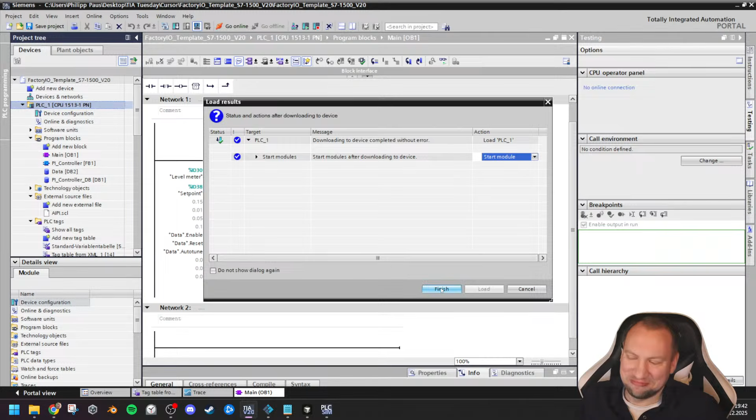So, he just asked something in German and I answered in German. Basically, he asked, hey, do you also accept German questions? And I'm like, that was a German question, but also ask the German question, and then I will decide. Yeah, so, I have downloaded this. I can, ich spreche nicht Deutsch. I do speak a bit of German. Just a little bit.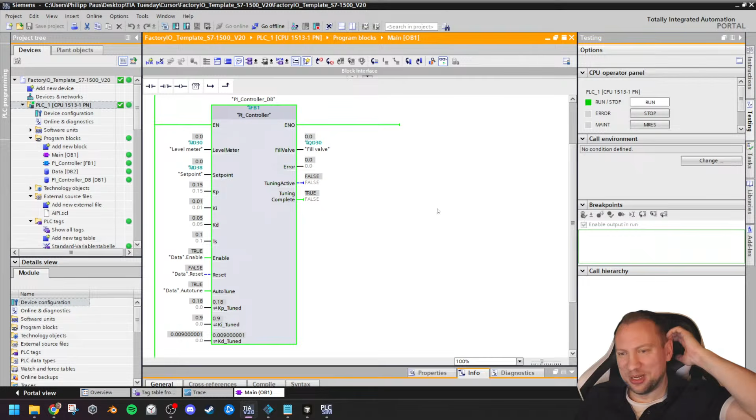So, let's have the tuning again. Set point is 5. Now for tuning, I will now enable tuning. Tuning complete worries me a little bit, that it is instant. And I will now also enable, and I will retrigger the tuning here. No, tuning doesn't seem to be perfect. At least I don't understand how it works. Tuning right now just turns on tuning complete. It changes the values though, but not perfectly. It changes them always to the same values. Doesn't matter, right? We're not here to really incorporate the block.

We have a PI controller, right? And we could very easily open up any other system here, any other scene. For example, elevator advanced, whatever that is. And I could describe to my AI right now in Cursor, hey, here is my system. It's a 3-story elevator system and it has a supply conveyor and so on. Can you please help me to program it? I have to describe this. This will take a longer time, of course, but it will most certainly take way less time than me actually programming this.

Whew. Crazy, and that's where we're at. So it's a great tool, not perfect yet, but hey, we have made AI code. This controller is pretty dope. Fantastic. Good. That's all I wanted to do. I actually had a second thing that I wanted to do in this, but I had too much fun with the AI now.

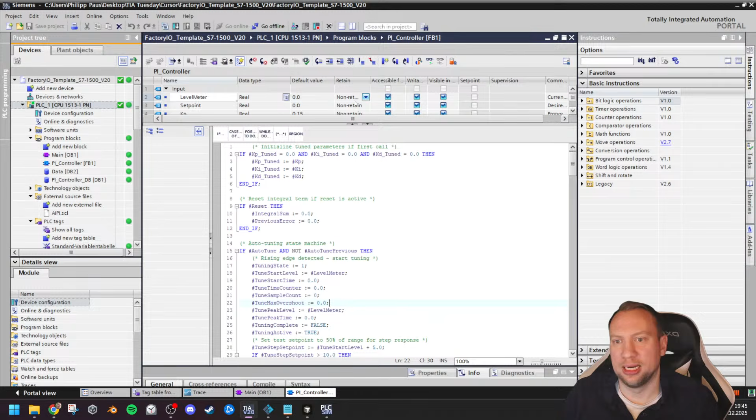What is the TS parameter? Maybe that's the tuning time. XRL asking what the TS parameter is. That was already there early on. The TS is most likely a time scale. Let's actually go in there. It gave me also comments to those. I would say this is the sampling time. Yeah, this is the sampling time in seconds. That is also why.

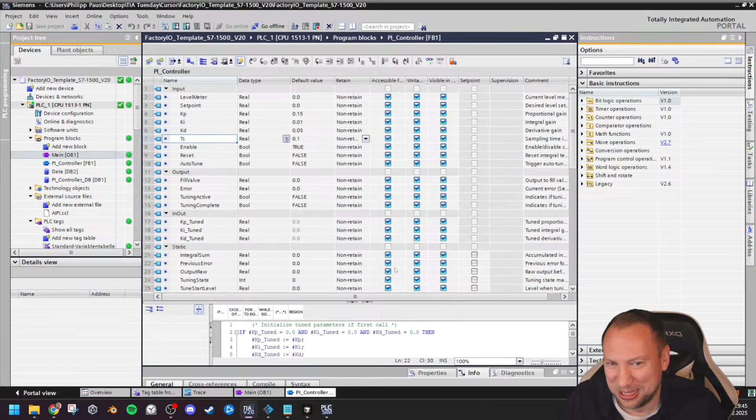Huh. Why do you ask? Why did I not listen early on? For those that don't know why I am right now upset with myself, which is probably all 100 of you. Maybe not. Let me just check one thing, what this thing is. It is probably what I think it is. Oh, come on. Cross-reference information. TS. Why don't you give me cross-reference info? The cross-reference information is invalid. It's not consistent or complete. I have never seen that. What? Okay. But no, I already found it.

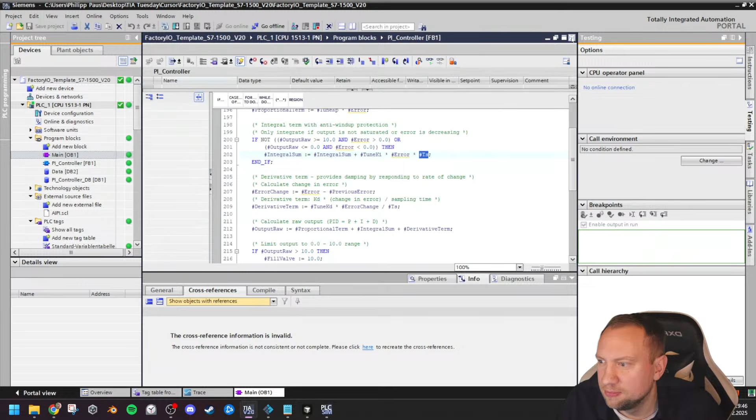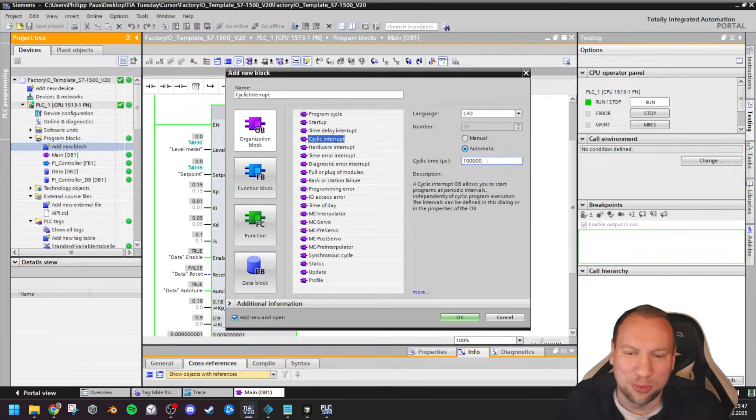If you don't know why I'm upset with myself right now, one of you earlier on asked an essential question, and I was like, nah, we probably don't need to do it because the AI has thought of this. It did not. The question was fantastic. Logic controls: this is 100 milliseconds and your PID is much quicker. Yes, you are completely correct. So of course tuning doesn't work. Of course the parameter changes won't work. It is working on a different time scale. I would have to wrap all of this into a cyclic interrupt of 100 milliseconds.

Which you told me early on. One of you, I don't know who it was. Let me scroll up, maybe I find it. I will not find it. But there was the question early on, and I just scrubbed it away. And the AI probably told me in one of the answers as well. Of course, it is a user error in the end. Now this will be much better, and now maybe it works.

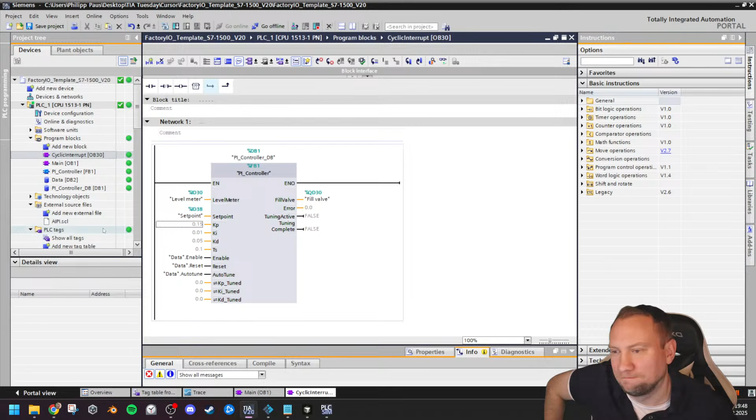I'm not upset. I'm just a little bit disappointed with myself right now. Which is fine, can happen, especially when streaming, especially when joking around a little bit as well. No, I'll keep those settings, thank you.

It's fine. Let's record, let's do all of those in the same scaling group. Let's put the scaling group from 0 to 1 to 10. Right? And let's turn on the bad boy. I do now have some inputs for this. Right? Autotune, I want to know. You are not supposed to autotune, you are supposed to enable now.

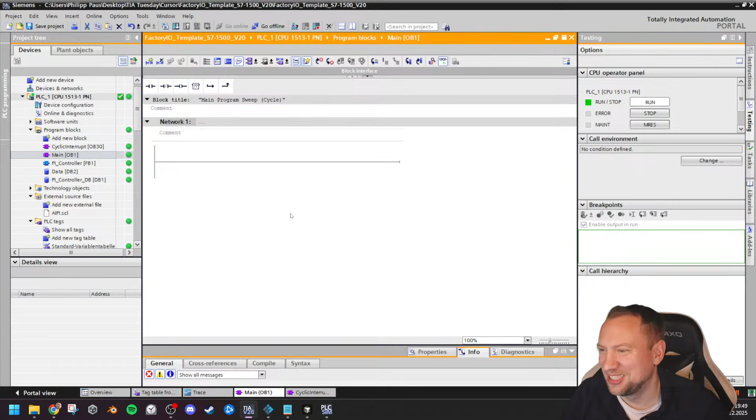Was it Video Kive? Thank you for looking it up. Thank you for looking that up. Thank you, Video Kive. Thank you, Assistant Google, right now.

It doesn't have to. I thought early on that inside of the program the AI was smart enough to calculate the timescale that it is currently working in, kind of. But right now, no. This is literally, I have to tell it how many times this block is executed. Like, what's the execution time? I think, don't know yet. I should have listened to the AI. I should have listened to all of you. I didn't. Simple as that. So that's the last one now.

Filling tank, level control. Let's look at level control. Let's play this bad boy. Let's put this back to PLC SIM.

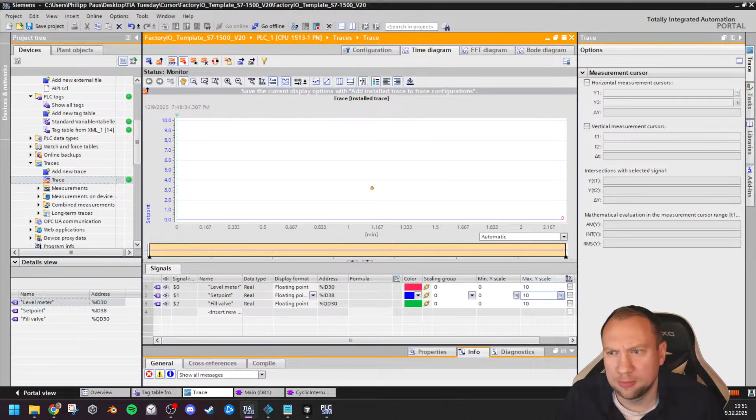There we go. And now let's put the set point somewhere. And maybe this is way, way better now. Shouldn't it do something? So fill valve is 0, tuning complete. Okay, level meter is 0, set point is 0. It's not 0. It's 5. PLC SIM? Is PLC SIM running? PLC SIM is running. Okay.

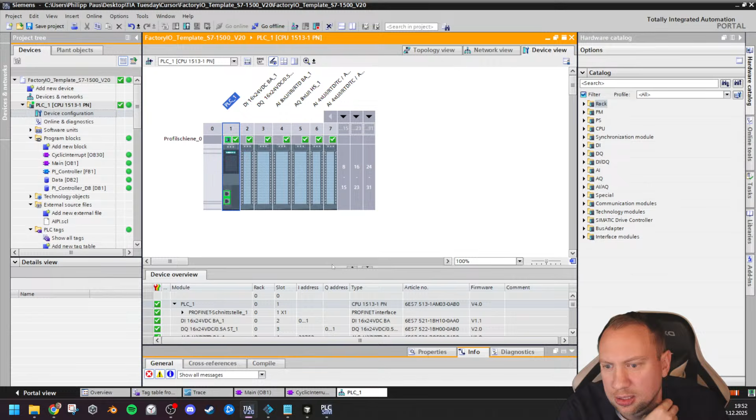Why set point this? 5.0. I cannot force it, so it is being overwritten. What? Do I have to manually add? No, I don't have to. Should be fine. There you see we have the set point. The set point currently has a value. It's at input double word 38. I just have to verify that input double word 38 exists here in my hardware. 1 second. Input double word 38 exists in my hardware.

I do have my tag table, and the tag table right now says 0. What's wrong with the communication with this? Oh, I know why. For Factory IO, for the communication, I have to run this strange script here, or it won't work. 1 second. Yeah, I've got this in there. I've got this especially in here. Yep. And now maybe the communication works. It's my assumption. No. Why?

So this is now not AI or anything. This literally is just the communication to Factory IO. It is probably because PLC SIM crashed early on, right? This is probably it, but I cannot verify. And it's not important. I was just fooling around now. This is not important at all. Sorry.

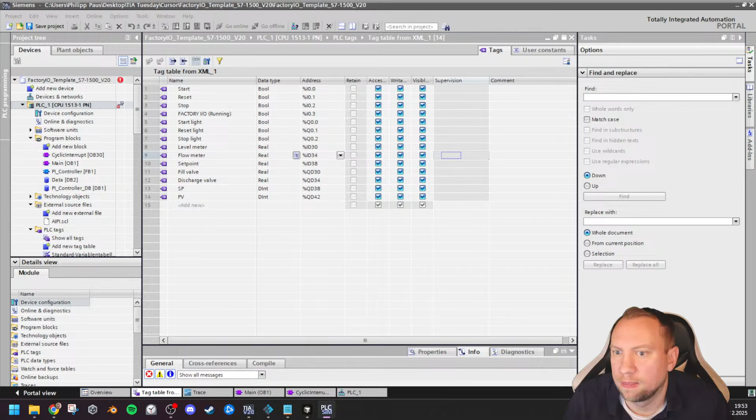Yeah, you see, kind of everything gets stuck here. We don't receive values from Factory IO anymore. So all of this has kind of crashed. Turn it off, turn it back on. No, all of this says the communication has crashed. Let me try to put another thing there, PLC SIM. Yeah, PLC SIM, configuration, 1500, connect. Not possible to connect, that's okay.

Connect. More than one instance of PLC SIM has been detected. So it crashed and something got stuck in the background. Yeah, that is the problem right now, which isn't too important. Last attempt now.

PLC SIM is not running anymore, but our PLC here is online. How is this possible? This is not possible. So some process inside of PLC SIM is right now stuck.

No, I cannot fix this right now. I would have to restart my PC. I could use CCleaner, I could do many things, but I will not right now.

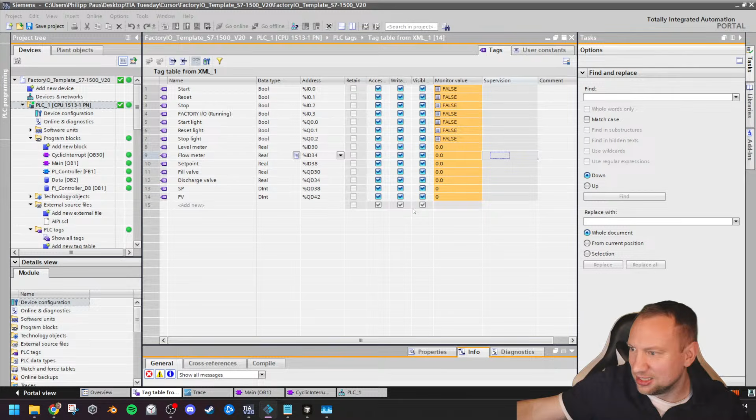When you run the SCL script, it gives you red labels and alarm values are invalid. That might be, I have to manually fix a lot of things sometimes.

Let's see. So this is okay right now. This is the communication there. We still have a working PI controller.

Maybe next time, next TIA Tuesday, I will spend the first 5 minutes to get into this and show you how fantastic this works. I would have to restart right now my PC, which I will not, because that would end the stream, and I would not come back online if I ended once.

This was still so exciting, so cool to see that an AI just created a very complex controller for us. The only problem with this AI generation was me in the loop. I did a couple of smaller mistakes and I didn't read the notes that the AI gave to me.

It could have been much better. I could have made this much better by just reading and taking the time. AI is a very, very powerful tool. You still have to be able to work with this. It's not like this magic thing that will take away everything from you. You still have to be able to work with this.

Definitely, which I failed a little bit because I was rushing it. I'm streaming and testing this out myself. If it would just have been me on my own testing out all of this, I would have taken much more time, right?